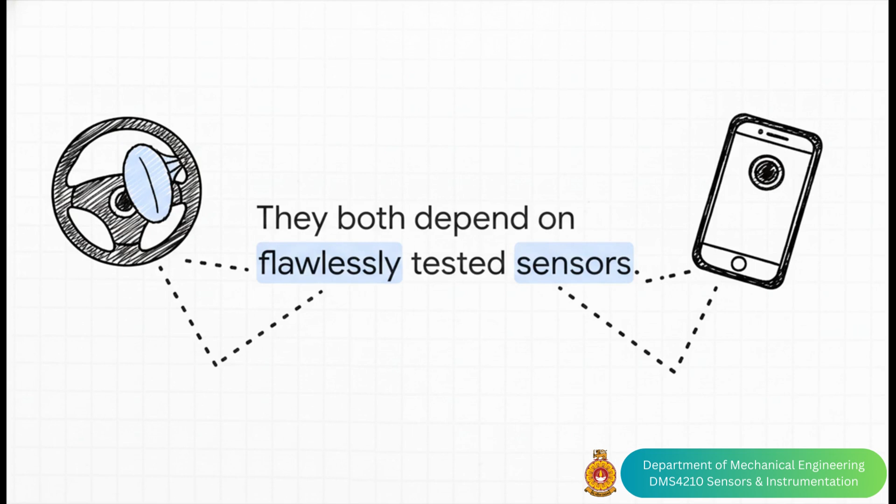And there it is. They both rely on sensors that have been tested to perfection. Whether it's the accelerometer that feels a crash or the image sensor that sees the light, their reliability is absolutely no accident. It's the result of a super intense and careful process. And that process is what we're diving into today.

So, what does sensor testing even mean? Well, before any sensor gets to go out into the world and do its job, it has to prove itself. It has to earn our trust. And that process has a whole rule book.

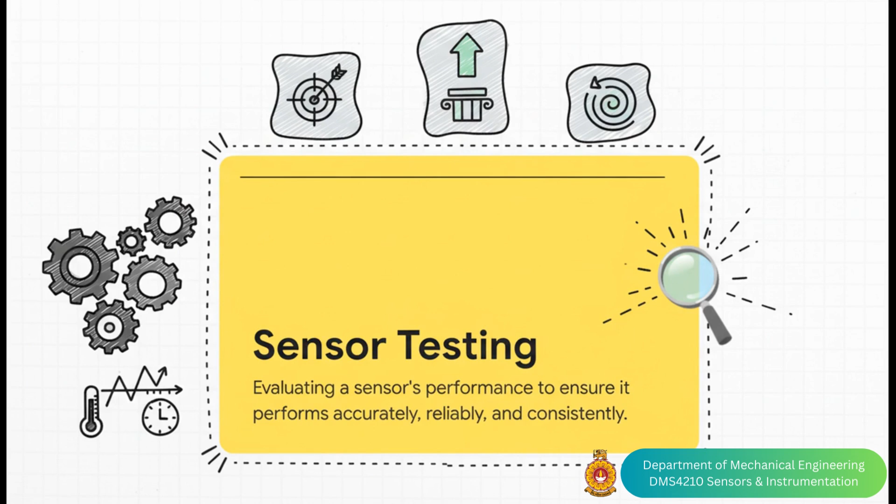Okay, the keywords on this slide are everything. It's not just about does it turn on. It's about making sure it performs accurately, reliably, and consistently. Think of those three words as the absolute pillars of sensor testing. Without them, you've got nothing.

And this really shows you that testing isn't just a simple pass-fail. It's more like a deep investigation. Engineers are trying to map out the sensor's entire personality, how it behaves when things are calm, how it reacts when things get crazy, and even uncovering its tiny little quirks and flaws, all to make sure it's absolutely the right sensor for the job.

And to really get to know that personality, testers have to look at it in two totally different ways. You can kind of think of it like putting the sensor through both a marathon and a high-speed sprint. Each test is designed to uncover something completely different.

So on one side, you've got static testing. This is the marathon. How does the sensor hold up when the conditions are stable or changing really, really slowly? And on the other side, dynamic testing. That's the sprint. What happens when the input changes in the blink of an eye? You absolutely need to know both.

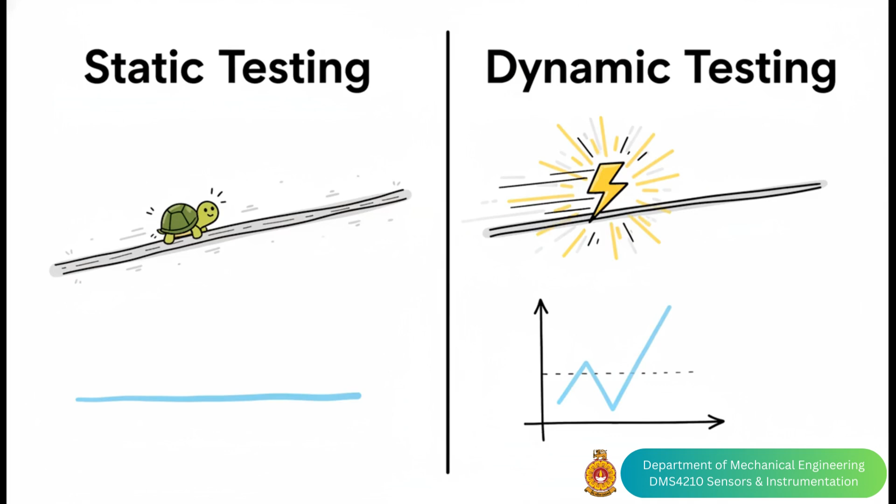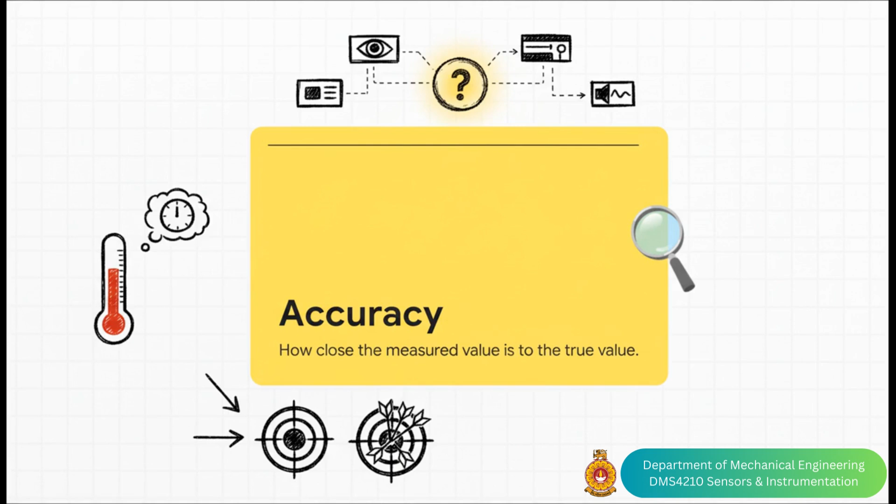Let's dig into static tests first, starting with the big one, accuracy. This is the most basic question of all. Is the sensor telling the truth? I mean, a small error in a medical sensor could be a disaster, right? Or in a plane's altitude sensor, forget about it. Honestly, if a sensor isn't accurate, nothing else really matters.

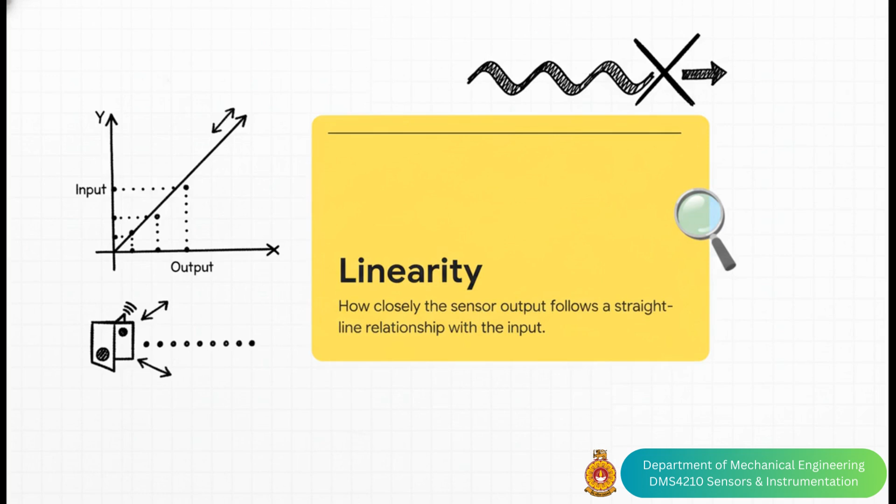Next up, we've got linearity. Now, this sounds a little technical, but the idea is actually super simple. You want the sensor's reaction to be predictable. If you double the input, you want a predictable change on the output. A nice, straight-line relationship just makes the data so much easier to understand and work with.

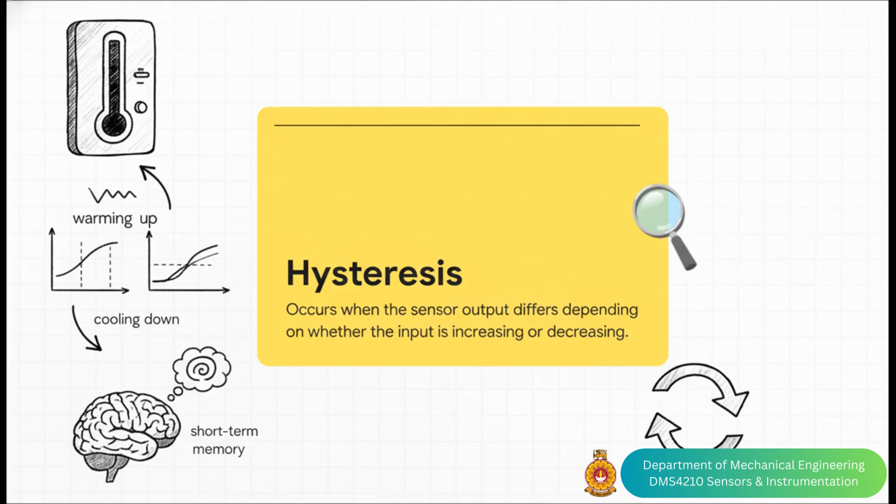Now, this one is really fascinating. Hysteresis. Picture a thermostat. Does it show you the exact same reading for 70 degrees when the room is heating up compared to when it's cooling down? If there's a difference, that's hysteresis. It's almost like the sensor has a little bit of a memory of where it's just been.

So how in the world do you test for that memory effect? It's actually a pretty cool process. You basically take the sensor on a round trip.

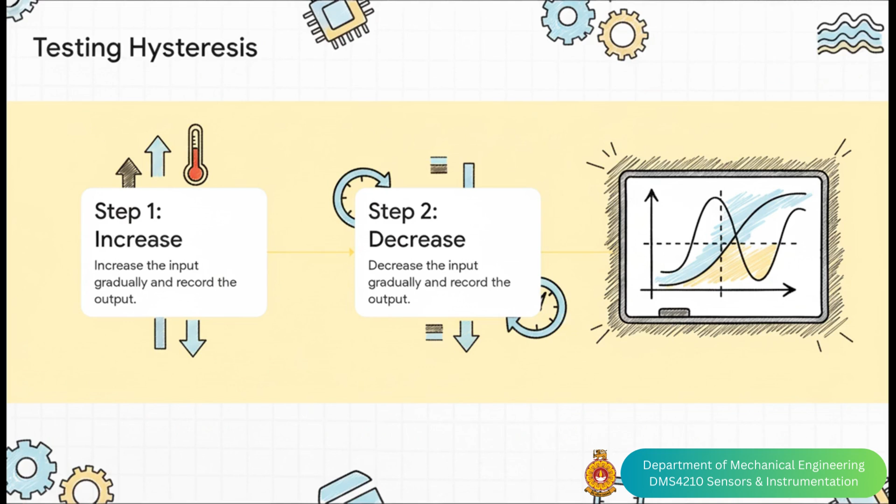You slowly dial up the input, let's say it's temperature, and you record the output all the way up. Then you slowly dial it back down to the start, recording all the way. If there's any space between those two lines on your graph, boom, that's your hysteresis.

Okay, time to switch gears to the sprint, dynamic testing. And the undisputed star of this show is response time. When something happens in an instant, how fast does the sensor actually notice it and report back? That airbag sensor we talked about, it needs a ridiculously fast response time, but a thermostat in your house, it can take its sweet time. It's all about matching the sensor's speed to the job it's got to do.

So a sensor can be perfectly accurate and super fast inside a nice, clean lab. But what happens when you throw it out into the real world where things are messy and unpredictable? Well, that's when it faces the ultimate challenge, trial by fire and ice and a whole lot more. This right here is basically boot camp for technology.

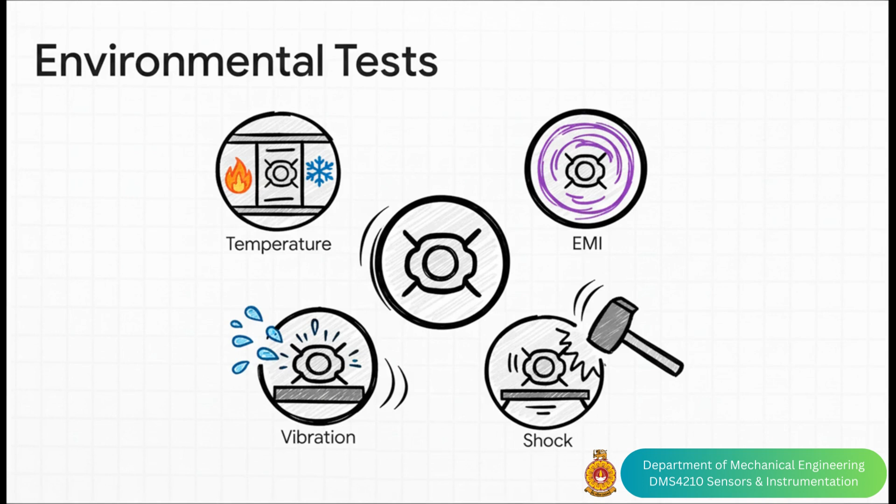Can it handle scorching heat or freezing cold? What happens if it gets wet? Can it survive being shaken around inside a car engine? Will weird radio signals mess with its readings? A sensor doesn't get approved for duty until it proves it can take whatever the real world throws at it.

All right, so our sensor passed its accuracy tests, its speed tests, and it survived boot camp. We're all done, right? Not quite. There is one final, incredibly important step, validation. This part answers a slightly different question. We know it's a good sensor, but is it the right sensor for this specific job? And there are a few ways to figure that out.

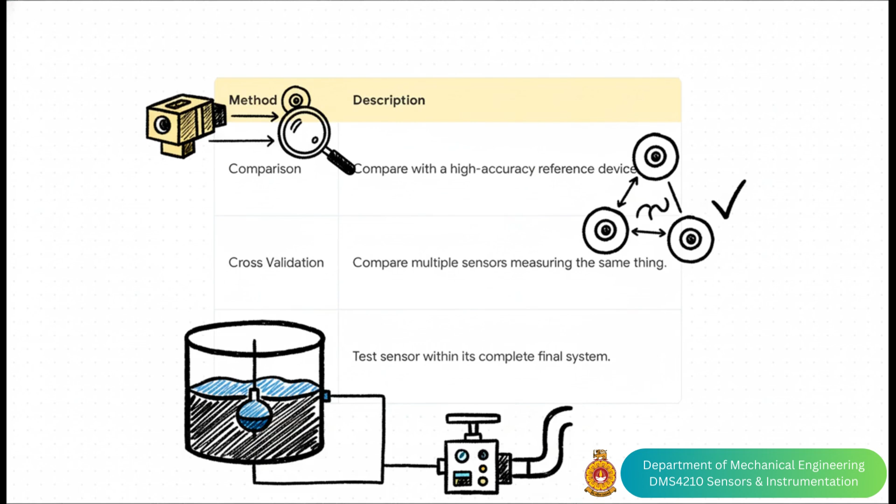You can compare its readings to a gold standard device that you know is super accurate. Or you can do what's called cross-validation, where you get a few of the same sensors and see if they all agree with each other. But maybe the ultimate test is system-level validation. That's where you put the sensor into the actual final product and test the whole thing together.

Okay, I know we've covered a lot of ground here, so let's make it all crystal clear and walk through a real-world example of how you test a simple temperature sensor. So here's how it works. You put the sensor inside a special chamber where you can control the temperature perfectly. Right next to it, you place a high-precision thermometer as your reference. Then you just slowly crank up the heat step by step, and at each step you write down what both the reference and your sensor are saying.

At the end, you plot that data on a graph. And that one simple line tells you pretty much everything: how accurate it is, how linear it is. It's a simple idea, but unbelievably powerful.

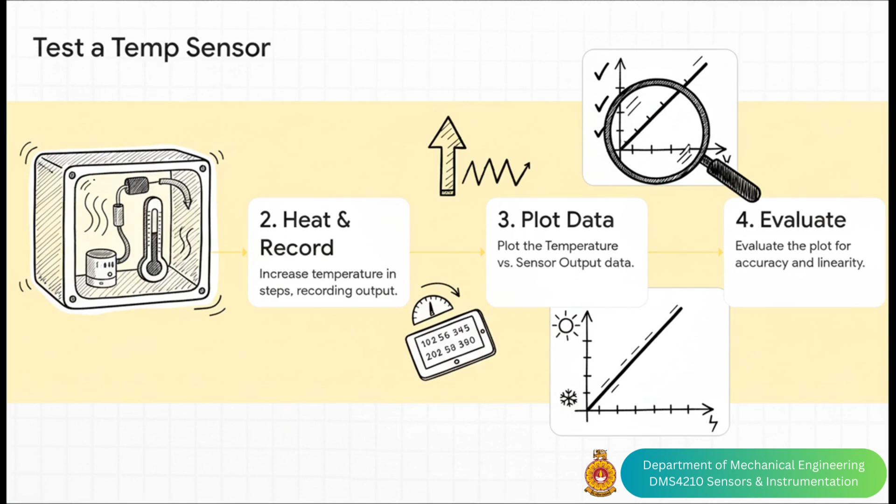And really, that's the entire journey. We take something that happens in the physical world, a change in heat, motion, whatever, and we put it through this whole demanding process of testing and validation. What comes out the other side is an electrical signal that we can actually truly trust. It's literally the science of creating certainty.

You know, when you think about it, this whole process is way bigger than just engineering. Our entire future, from self-driving cars to medical breakthroughs to exploring space, it all depends on this science of trust. It really makes you wonder, as our sensors get smarter and more reliable, what's the next huge frontier they're going to help us conquer? What new things are they going to let us see?